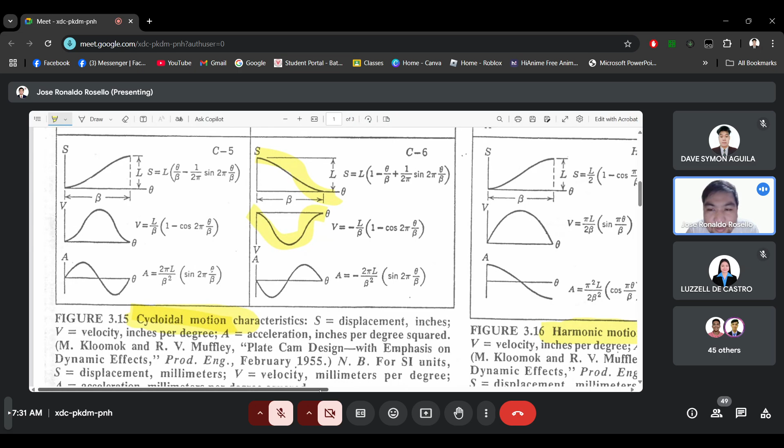Then we have to design the curve based on these templates. During the exam, I will just give you what kind of motion, then you will choose which among these you will use. So if, for example, using analytical method and we have a cycloidal motion, you will select from these 6 — C1, C2, C3, C4, C5, and C6 — depending on the requirement.

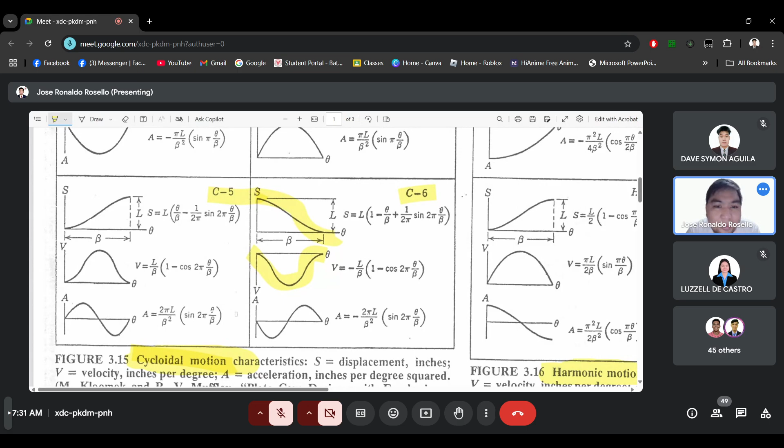So the formulas are all different from each other. Let's analyze the formulas. We have L, which is the lift, and this lift will be used in this computation. We have 2 types of angle, the angle beta and theta.

It will also be used here in the computations. So here, we don't have to convert the angles to radians, because it is used in the sine function. And here, on theta over beta, even if we convert it to radians, it will only cancel out. So no need to convert here.

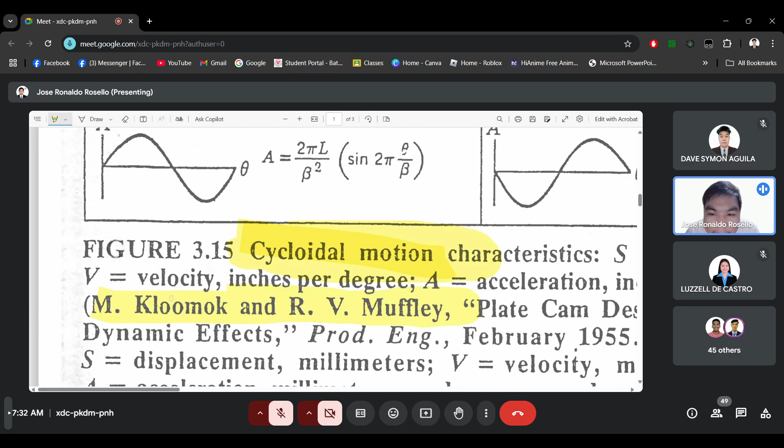Then for this one, I think no need to convert also, even if it's divided by the length. These are all derived formulas, so how this was made, I don't know. But anyway, this is the cam displacement curve for that. The difference here is, for example, for the displacement...

In the previous approach or method that I taught you, we will be using a cam displacement curve, and in the curve, we will measure the height from the x-axis, which we will copy to our base circle to compute for the displacement. But here in the analytical method, it is computed.

Meaning, for a given angle, here the angles are given, there will be a definite answer for the displacement. So whatever the answer is, that's what we put on the base circle. It's computed, not like the graphical method that we used last week, where we made the curves and just measured the distances from the x-axis to the curves. So that's the difference. Using this analytical method, we will have a more precise cam displacement curve.

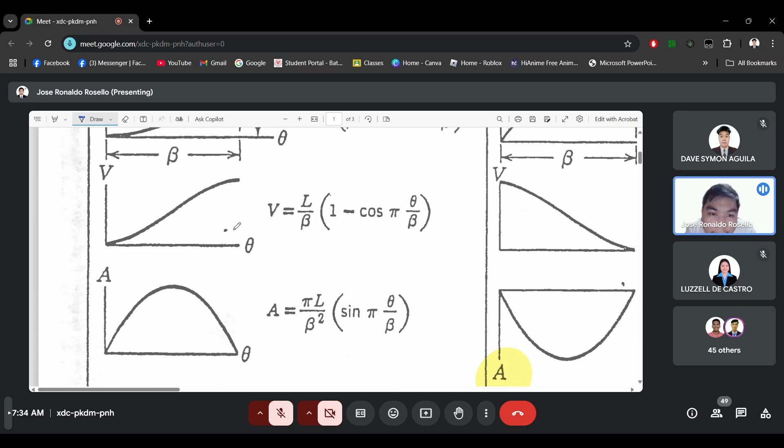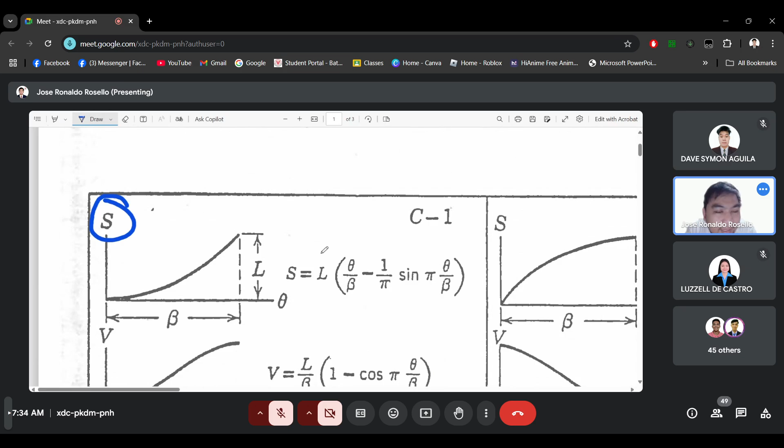And for velocity, this is only for reference, because in the graphical method, we did not compute for velocity and acceleration, which is okay. Velocity and acceleration can only be computed using the analytical method, not the graphical method. So in the graphical method, we only have the displacement curve, and in the analytical method, we have velocity and acceleration.

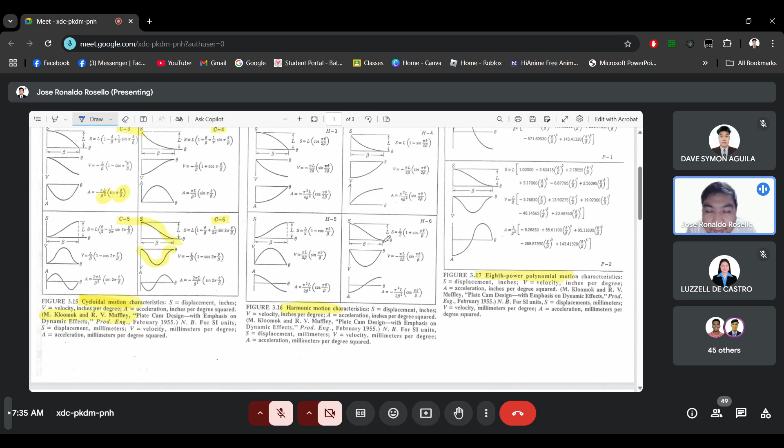So again, depending on the requirement of the problem, you will have to choose among these C1 to C6, which formula you will use, and which curve you will use. Same with harmonic - harmonic has 6 types of curves also for displacement, velocity, and acceleration, depending on the problem we will use. Later on, I will give you a sample problem for you to see how it is applied.

Then for 8th power polynomial, there are only 2 choices which we will use for this. What's key, or what's a hint for using this, is when starting a motion, our starting motion will definitely always start at 0. So in looking at these curves, which curve starts at 0?

So we have C1, C2, not C4, C5 - yeah, only these 3. So if the given problem says the cam and follower motion starts with a cycloidal motion, we will only select among these 3.

If the problem states that we design for a cam which starts with harmonic motion, let's look for motions of harmonic that start from 0. So like also this one - H1, H2, H5. So how about the others? Because the motion of the cams can be a combination of motions.

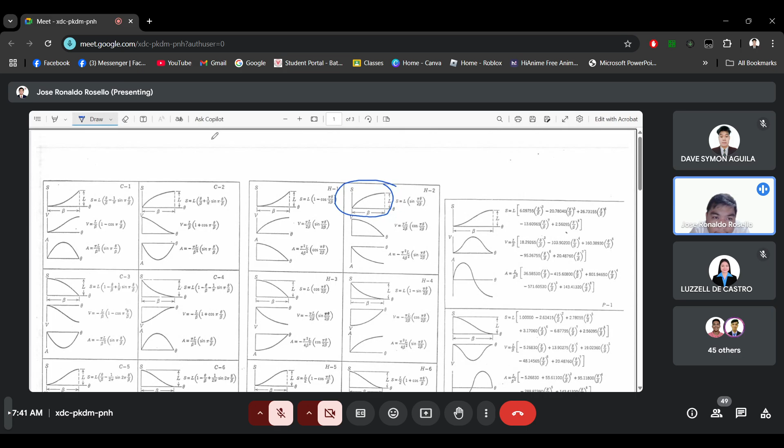So don't be confused that since in the drawing, the displacement starts from 0, it does not mean that the succeeding motions must also start from 0. So if we have two motions, for example cycloidal, then the next motion is harmonic, only the cycloidal should start from the x-axis. While the other motions can be connected to the motion of the previous one, even if it looks like it starts with the x-axis, we can still use it because it only depends on the first one who will start the x-axis. The curve must be followed.

Very confusing, so again, for the succeeding motions, it does not have to start with the x-axis, only the first one. But the curve must be maintained. So if we have a sample that the harmonic motion follows from cycloidal motion, we will start with the cycloidal motion that starts with the x-axis. Then, regardless of the curves, if it starts with x-axis or not, when connected to the previous motion, it must make a fluid curve. So here we found that C1 and H2 can be connected.

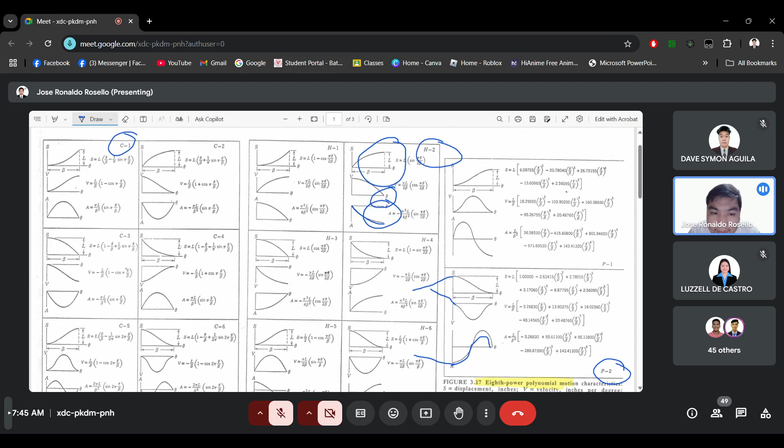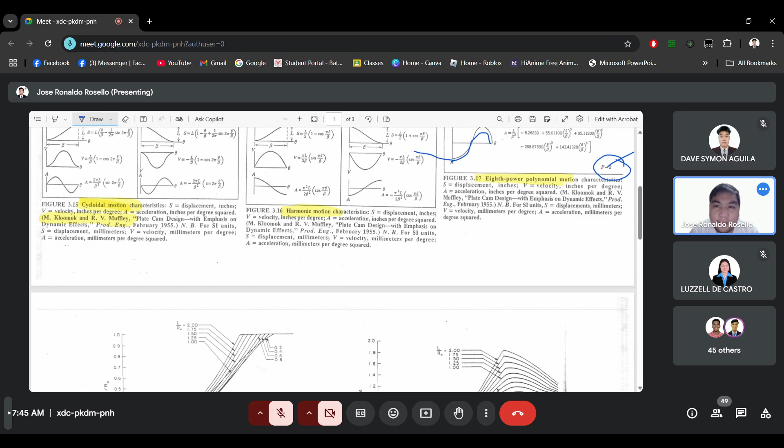So again, the concept is when given the motions on the design problem, we will have to select which among these curves we will combine to achieve the required motion. So if the required motion starts with cycloidal, followed by harmonic, and ends in 8-power polynomial, we can use C1, H2, and P2 as the combination. Okay, so that's the graphical analysis, the analytical analysis of cam displacement.

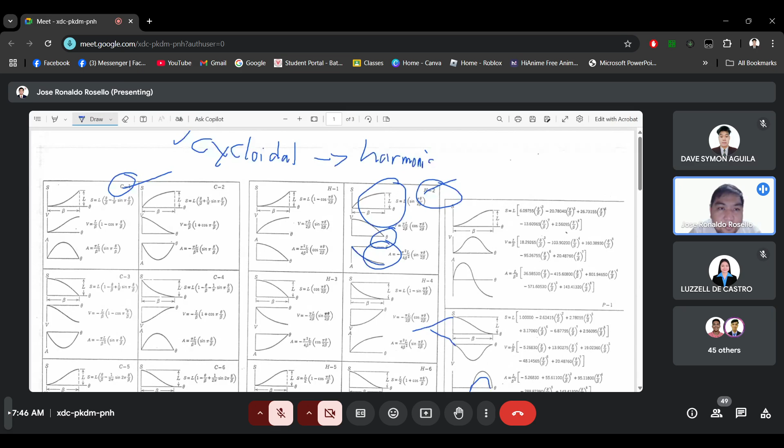Okay, I will show you a much thorough explanation for this one. This will be part of the final exam. There will be a design problem consideration, and you will have to select among the given formulas which you will use.

Okay, for cam displacement curve on the analytical method, we have Kloomok and Muffley here. We have the formulas here. I made this presentation a step-by-step procedure so you can follow it by studying it yourself. Then, its application, how do we use it? So, for example, this is the given design consideration.

The cam profile is defined by the combination of motion curves as follows: it starts with 8-degree polynomial, then followed by harmonic motion, then ending at cycloidal motion. The total lift is 70 mm, so the lift is given. If the design will not allow any sudden change in acceleration value, and the lift and return in the harmonic and cycloidal portion is 35 mm each, determine the following. What does it mean? Let's analyze first the problem. First, it is given that the motion is started by 8-degree polynomial motion, or what's it called?

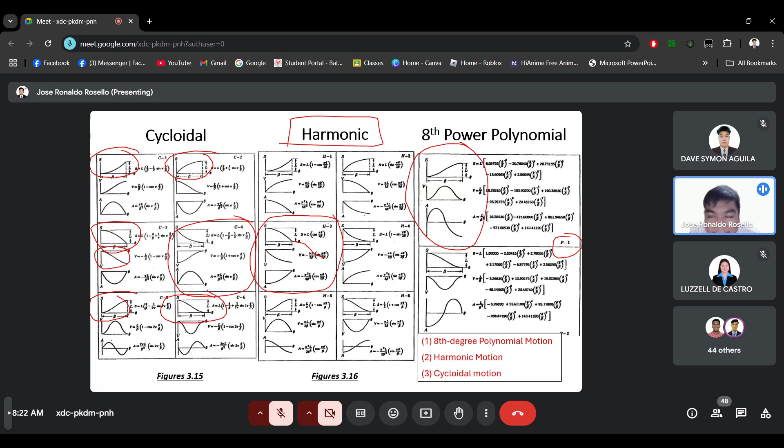So once we have selected our curves P1, H3, and C4, we will have to make a sketch of how it would look if we connect them. So the sketch would look something like this. Again, the middle motion does not have to end with 0, but the motion should look the same. So here, it starts from 0 from P1, then it goes down using H3, then it goes back to 0 using C4.

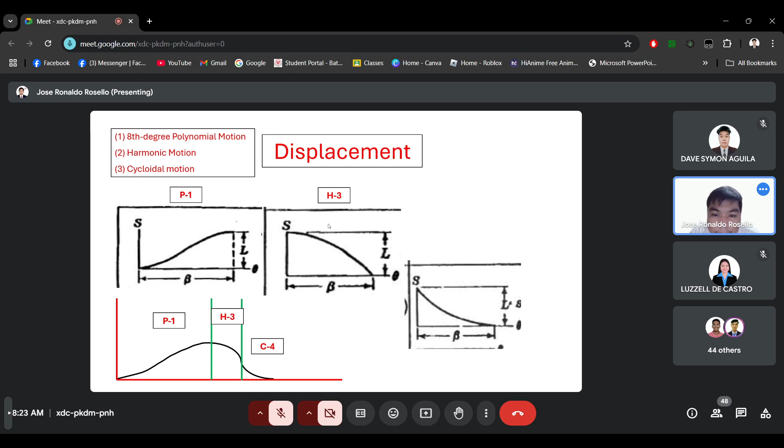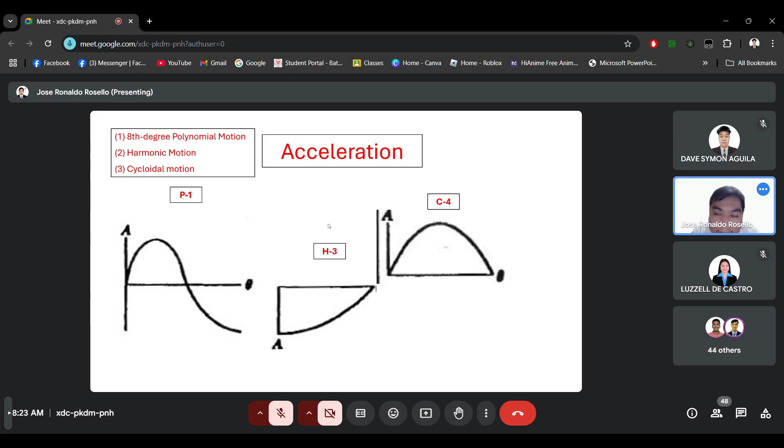Then for the velocity curve, it starts from 0, then ends at 0 also. Then for the acceleration, it's the same thing, as it starts from 0 and ends with 0. So it's a matter of imagining how the curves will look when joining them against each other. So once we have joined them, it would look something like this.

And if we divide it into parts, we will have 3 distinctive parts of the motion, and we will designate them as beta 1, beta 2, and beta 3. So beta 1, 2, and 3 define the cam rotation angle. So for every cam rotation, how much angle did the cam have? So that's the second part: calculate the interval of each motion by matching the values of their velocities and acceleration.

So given here, the total lift is 70. Meaning, if the maximum lift for harmonic and cycloidal is 35 mm each, we can only use 70 on the first motion, the 8 power polynomial. Then for the formulas that we will use on harmonic and cycloidal, we can only use L equals 35. But for the 8 power polynomial, we can use L equals 70. We will use L 70.

Then, we can match the values of velocities and acceleration. Let's just choose among them. I have chosen to use the acceleration of the polynomial and the acceleration of the harmonic. So these formulas will be equated with one another, and we have to assume that theta here is equal to beta 1. Then we have to assume that theta here is 0, because the harmonic acceleration ends with 0. So again, the lift is 35 mm only for the harmonic and cycloidal motion, while the lift for the 8 power polynomial is 70 mm.

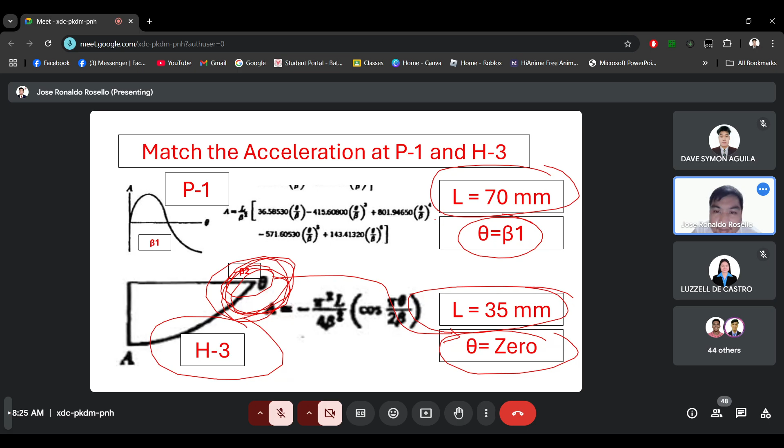So let's just substitute the values. For the formula, if theta is equal to beta 1, this is cancelled into 1. Number 1, 1, 1, and 1. Then L over beta 1 multiplied by this value will be equated to the acceleration formula of harmonic, where theta is equal to 0, meaning this will be cosine 0. Then we will be left with beta 2. So when this is equated here, we will have a simplified relationship of beta 2 is equal to this value multiplied by beta 1.

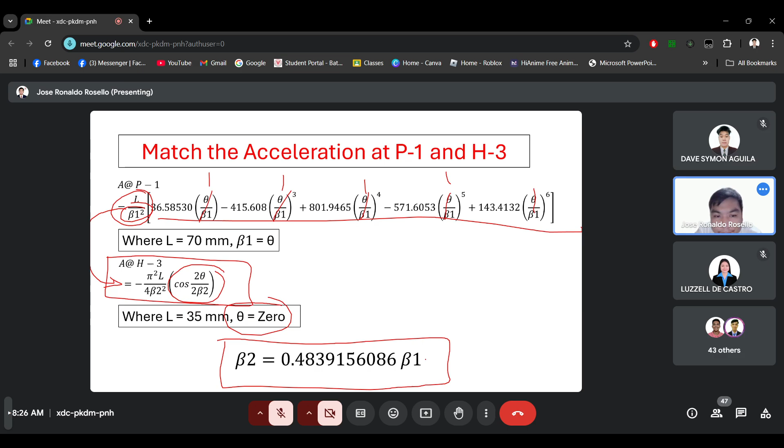Then, since we have three variables, beta 1, beta 2, and beta 3, we have to make three equations or three relationships. We already have two. The first one is beta 1 plus beta 2 plus beta 3 equals 360. The second one is this one, beta 2 is equal to beta 1 times this value. Then for another one, we can match the velocities at H3 and C4. Again, we can match velocities of polynomial and harmonic, or polynomial and cycloidal. But for this one, I used matching the velocities of H3 and C4.

Again, for theta and beta 2, we can assume they are equal. This is only for the computation of this one. Then theta is 0 because, again, the velocity here ends with 0. Then both lifts are 35 mm because we will be using harmonic and cycloidal, and in the given problem, there is only 35 mm of lift for harmonic and cycloidal.

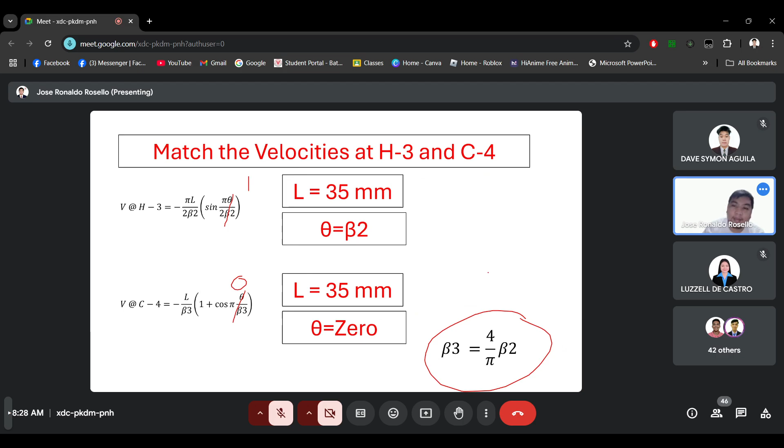Then we select the formulas from the table of Kloomok and Muffley. Again, theta and beta 2 can be cancelled into 1 because they are assumed equal. Then this will be cosine 0, and we will now have this relationship: beta 3 is equal to 4 over pi beta 2. Then, since we have three unknowns, we now have three equations. We can compute for each.

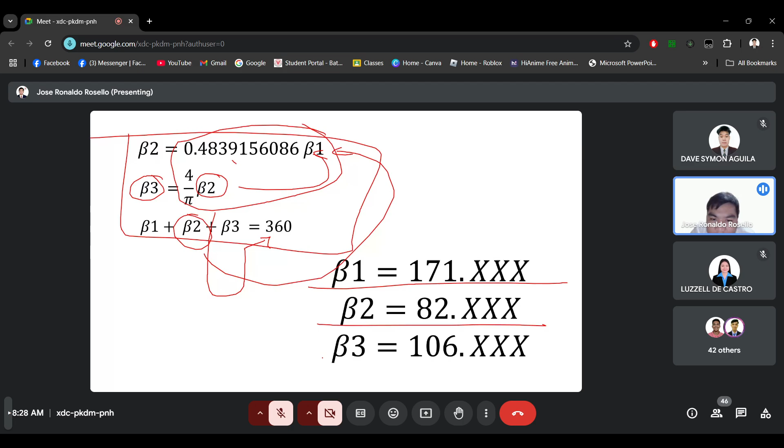Let's substitute beta 2 here with this one, and let's substitute beta 3 here with this one. We will now be able to compute for everything, whereas beta 1 is 171, 82, and 106. Meaning, in this cam displacement curve, the first part, the 8th power polynomial, takes 171 of cam angle rotation. Then we have 82 of cam angle rotation for harmonic, and for cycloidal, we have 106 cam rotation.

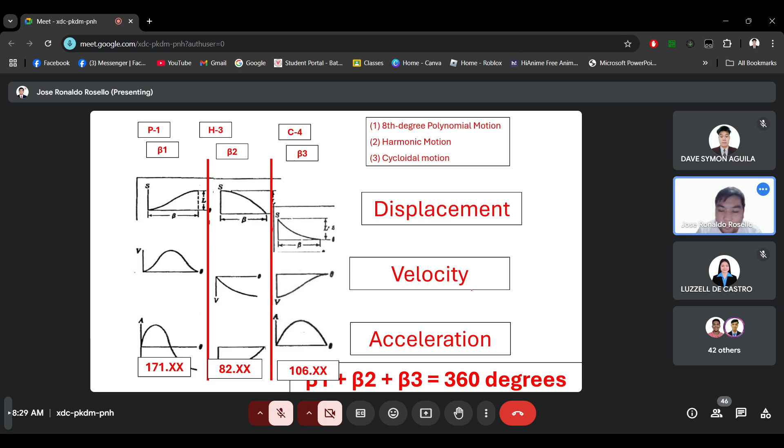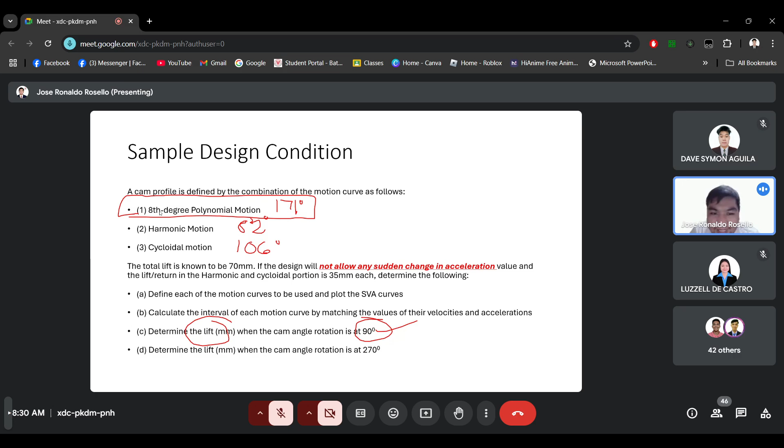Then another ask in the problem is to determine the lift when the cam angle is 90. Meaning, for the formulas that we will use, for theta we will use 90. First, let's determine at what motion 90 degrees is. We have computed that the 8th degree polynomial is at 171, harmonic at 82, and cycloidal at 106. Since 90 degrees is still within the 8th degree polynomial motion, we will use the formula for displacement on P1.

So, using the formula for displacement at P1, theta here is 90, the lift is 70, and beta 1 is 171. Then all will be substituted into this formula, and we will now have the displacement of 33 point something.

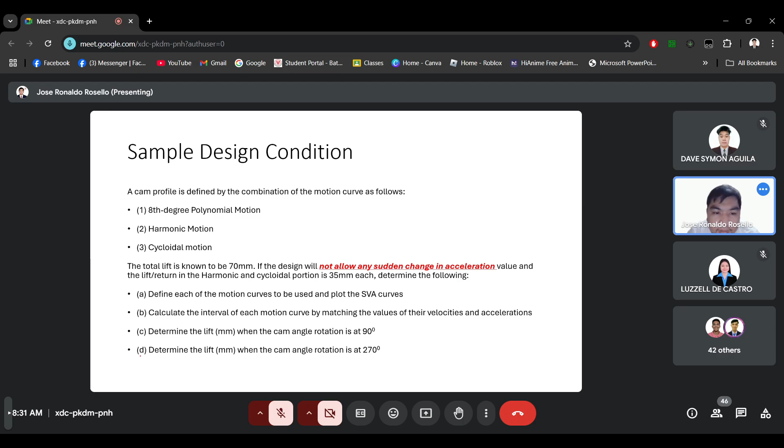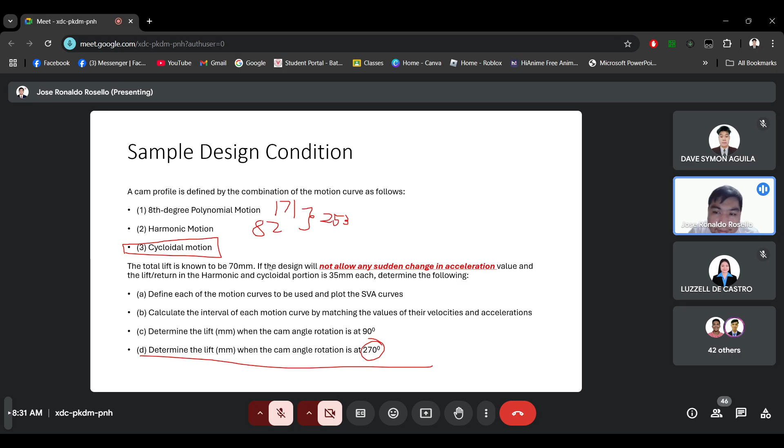Then lastly, as given here again, determine the lift when the angle of rotation is 270. So where is 270? Again, for the 8th degree polynomial, we only have 171. For harmonic, we have 82. And the total of these two is 253. Meaning, at 270, we have cycloidal motion. So the lift formula we will use is from the cycloidal motion.

So using the displacement formula at C4, here, theta is 270 minus beta 1 and beta 2. So we have to remove the angle of rotation from the polynomial and the harmonic motion. And beta 3 is equal to 106 as computed earlier. We just have to substitute everything here in the formulas, and we will have an answer of 24. Again, the formulas are only intimidating because they are long and have a lot of variables, but again, you will not have to memorize this one.

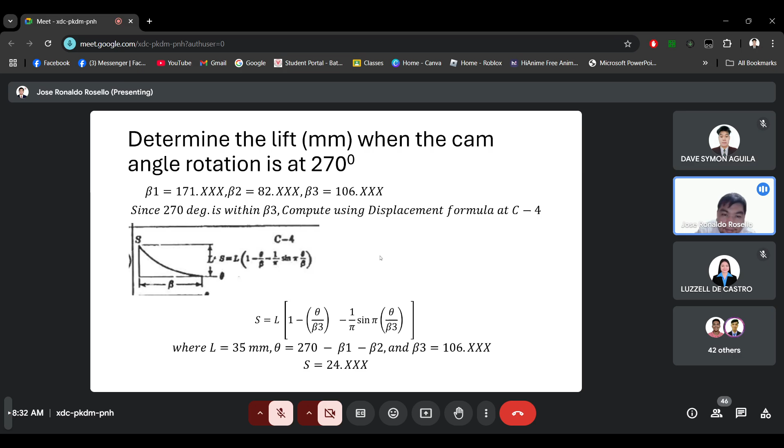So this is the cam displacement curve analytical method. So using a lot of formulas, using a lot of givens, we can determine the cam displacement curve.